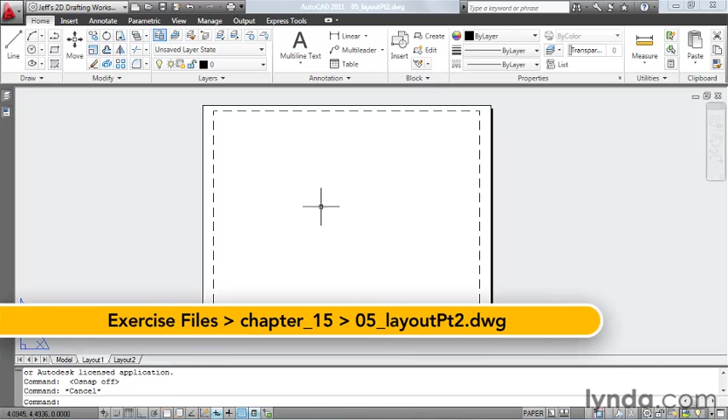Now that we've set up our layout and established a paper size, our next goal is to add the title block. Generally speaking, a layout acts just like model space, so if I wanted to, I could draft my title block right here on the Layout tab.

I could launch the rectangle command, and I could pick a point here and draw it to here. I could then press my spacebar to relaunch the command, and then let me turn on my running object snaps. I could start my rectangle at this endpoint and draw it to here, and I could slowly start building my title block. Instead, in an effort to save time, I've already created a drawing that contains my title block geometry.

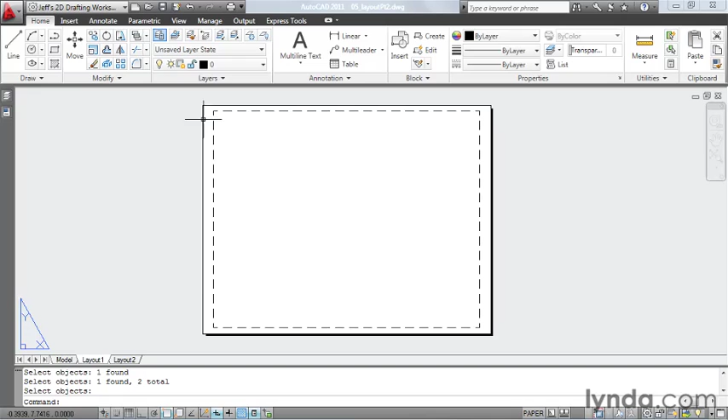Let's drag that geometry onto this layout. I'm going to erase these rectangles because I don't need these anymore. And then I'll move up and launch the Open command. And then I'll jump into the Chapter 15 folder inside our Exercise Files directory, and I'll select this title block drawing, and I'll click Open.

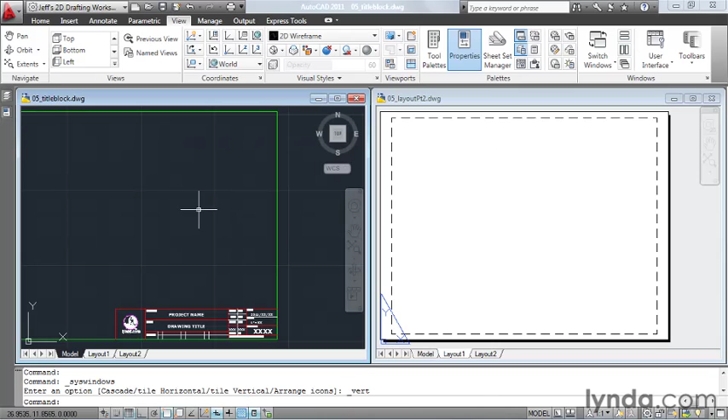Now that I have two drawings open in my interface, I'm going to click the View tab, and then I'll come down and click the Tile Vertically button. This gives me a nice side-by-side view of my files. Let's clean up these views a little. I'll start by zooming out and centering my title block geometry in this window. And then I'll click to put the focus in this window, and I'll pan this over and center my layout.

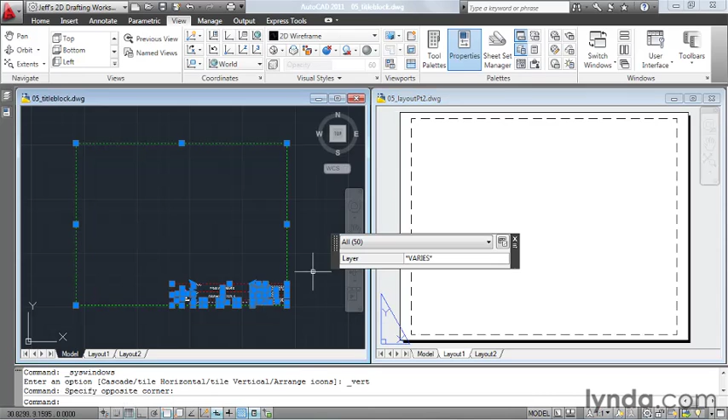To move this geometry onto my layout, I'm going to click to put the focus on the title block drawing, and then I'll select this geometry, and then I'll click and hold on a highlighted portion of a line, and I'll drag this into the other file. Now I will visually center this as well as I can.

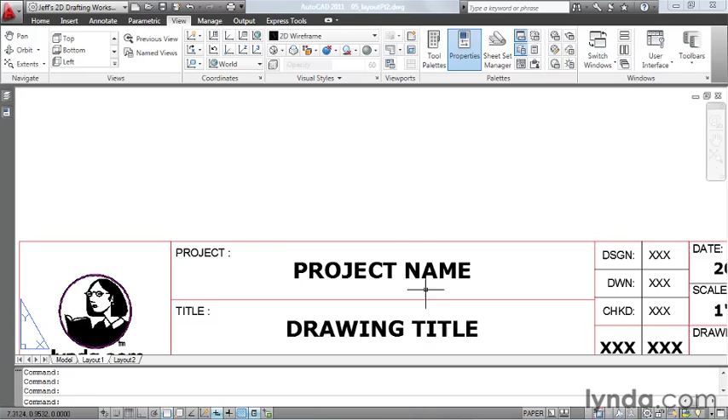All right, I don't need my title block drawing anymore, so I'll close this, and then I'll maximize the other drawing on screen. At this point, my title block looks like it's centered fairly well. If necessary, I can always come back later and adjust its location after I make my first plot. Now that the title block's here, I can zoom in and edit the text to suit my needs. The drawing that I'm printing is a headlamp mounting plate.

In addition to title blocks, layouts are also a great place to put notes, legends, north arrows, and scale bars. In our next lesson, we'll complete our layout by adding a viewport and setting our geometry to a measurable scale.